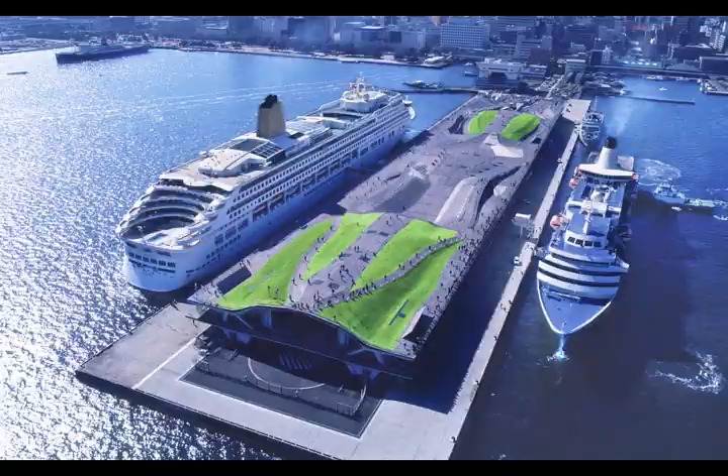The style of the terminal can be considered parametricism, a style recognized as being avant-garde and technologically adapted. The uprising of parametricism occurred during the modernist movement in architecture, and as P. Schumacher says, it succeeds modernism as the next long wave of systematic innovation. The defining concepts of parametricism include shared concepts, computational technologies, formal repertoires, and tectonic logic. Exemplified in the terminal, parametricism is, aesthetically, the elegance of ordered complexity in the sense of seamless fluidity.

While there is truth behind this sentiment of revolutionizing a new way of developing and utilizing architecture, the terminal was also designed with respect and reverence to the customs of the Japanese architectural vernacular, prioritizing congruous and sociable qualities. With an open, multivalent layout that allows for human autonomy while meeting specific functionality contingencies, the terminal fits within the cultural context of having life and openness in architecture, acting equally as a window of the past and as a window to the future. Spatial fluidity is present in the design through its incorporation of vast and seamless spaces, contributing to the establishment of a clear design theme and the congruency of the overall aesthetic.

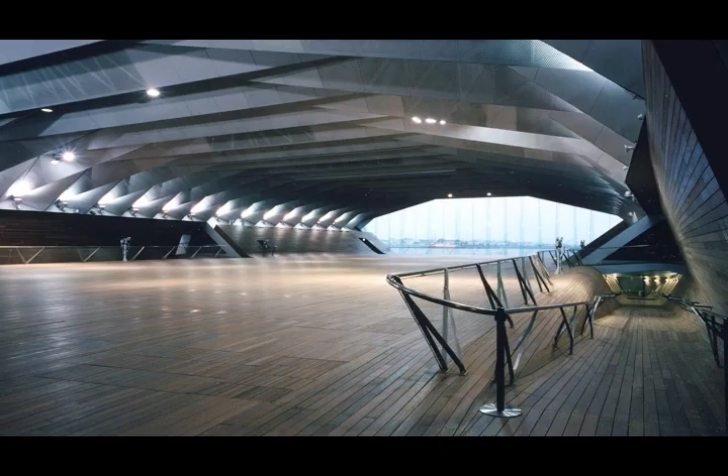This unrestrained and unobstructed design language contributes to the feeling of the static structure having movement and spirit. A specific way that this is done is through the harmonious blend of interior and exterior spaces, contributing to the lack of apparent forced enclosure and the connection of the people to the space.

Along with consideration of the interior and exterior, through the construction of the Yokohama Port Terminal, the environment played a significant role in the design and choices of Foreign Office Architects. Concepts such as the identity of the space as a transportation hub and the blending of the environment with a built structure were all focal points in the development of this project.

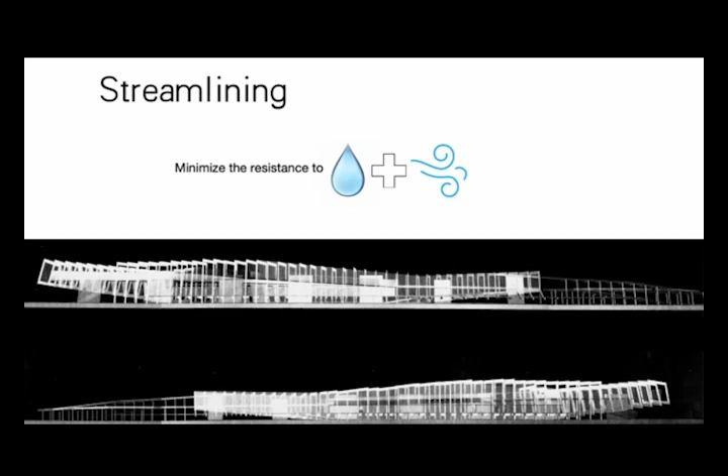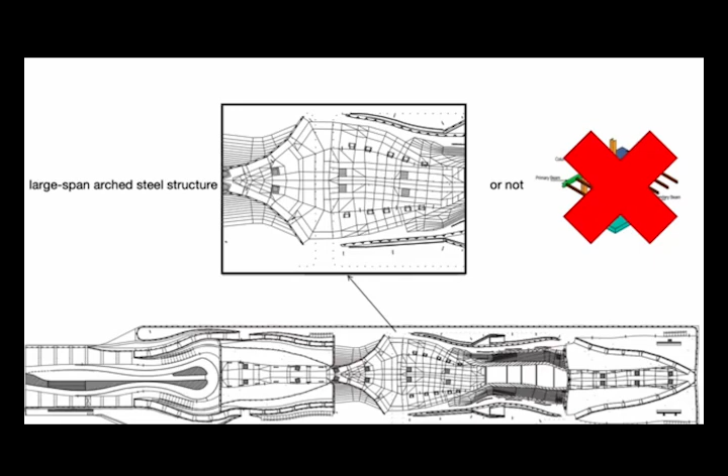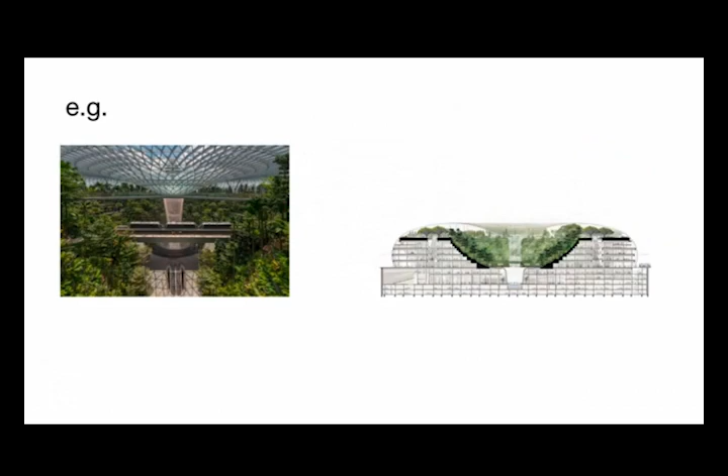Instead of the typical post and beam structure that can be easily replicated, the terminal building is constructed with a large span arch steel structure. This creates a flexible, column-free space with a seamless transition between the interior and exterior. As a result, it can be used both as a covered public space and for a variety of purposes beyond travel.

In this multifunctional space, all mechanicals and baggage handling units are designed to be concealed within the structure and raised timber floor system. The queues function as entry or exit borders and are assembled as mobile units on wheels, reversing the typical rigidity of border control arrangements and allowing the terminal to function beyond its regular function.

Through this combination of structure, flow, mechanical services, and material finishes, the terminal conveys planes, openness, and laxity, and efficiency in the parking areas, curves, fold, diagonals, symmetry, and utility in the terminal floors.

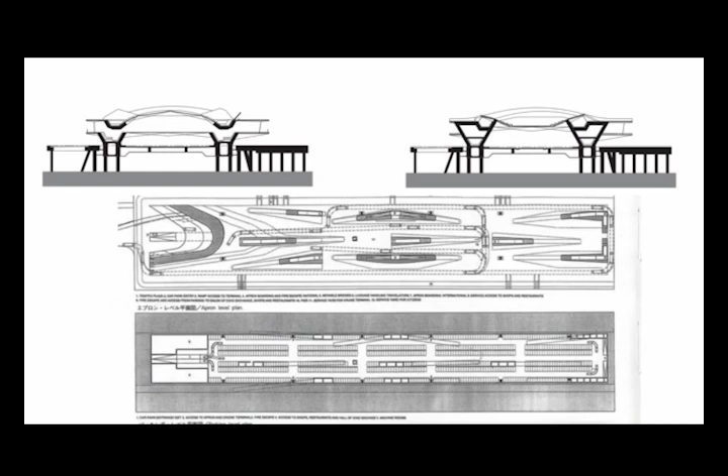This is the profile study model. According to the elevation pictures, we can see there is really good flow throughout the whole horizontal model.

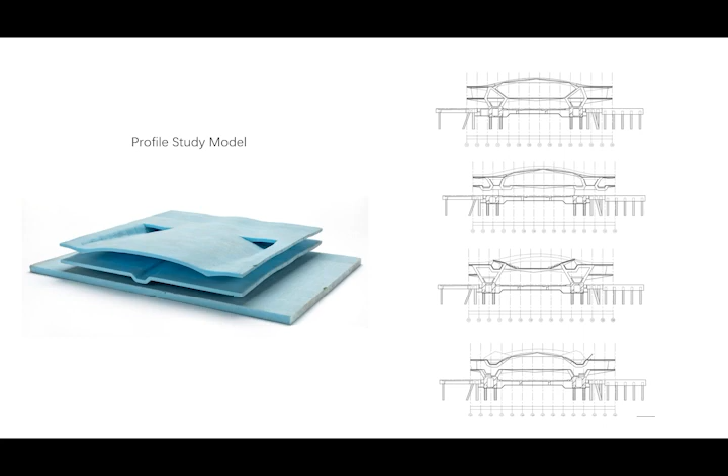Eventually, the whole building was divided into 3 vertical levels. First, the roof, which is just for people relaxing and watching the views. The second floor is more functional, with a restaurant, shops, and some halls, where people can spend their time while traveling. The first floor is just for transportation, like parking, elevators, and things like that.

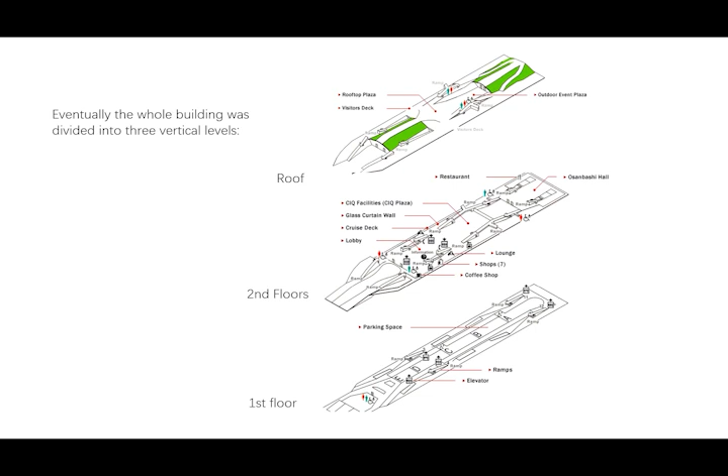When the building is viewed from this perspective, the original complex plan can be understood by everyone. Just like the picture shows, the plan displays the different functions, and it looks like a really symmetrical shape for the whole building.

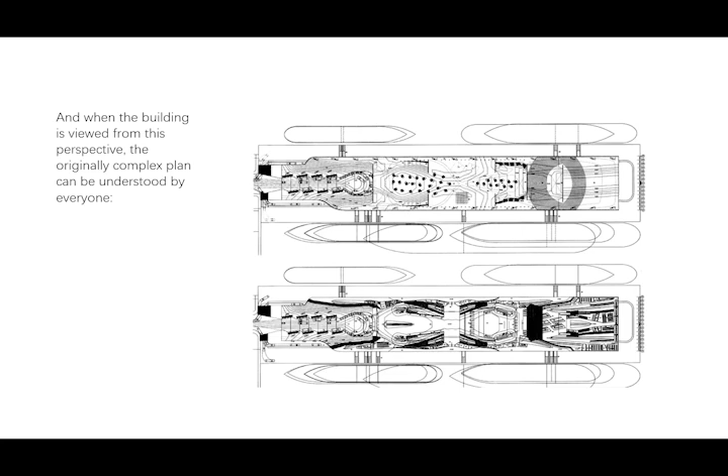Structure and materials: the realization of such a complex form was a severe test for the structure design. Guided by such an extreme concept, the building's space has a great span both vertically and horizontally. If a conventional column network structure was used to realize this, the original simple spatial approach would have been destroyed, which would have been a waste of space.

In collaboration with the structure design team, FOA finally adopted a unique structural system, a box girder made of folded steel plate, as shown in the pictures below, and steel trusses above the water surface of the terminal. This provides the building with lightness and flexibility to withstand earthquakes, and avoids interruption of the flow of space by structure elements such as columns and load bearing walls.

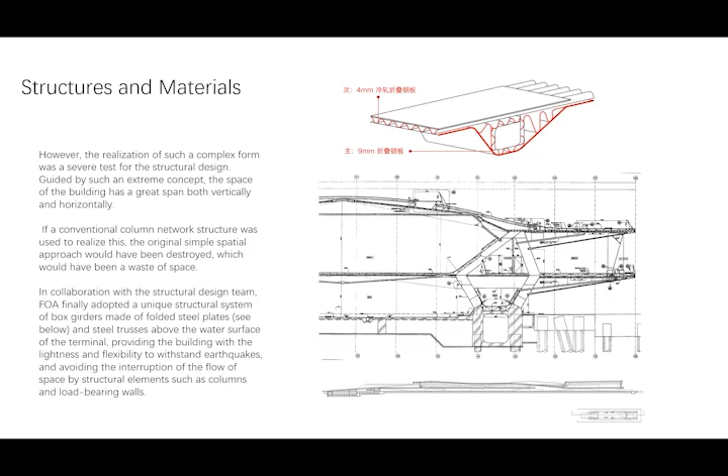The roofs and ramps, which are surfaces for people to walk on and rest, are surfaced with wooden boards, forming a section of undulating, barrier-free public space. This space is also connected to the 2 parks around it on the shore, realizing the continuity of the coast, ensuring an unobstructed view of the sea, and highlighting the natural atmosphere of the outdoors.

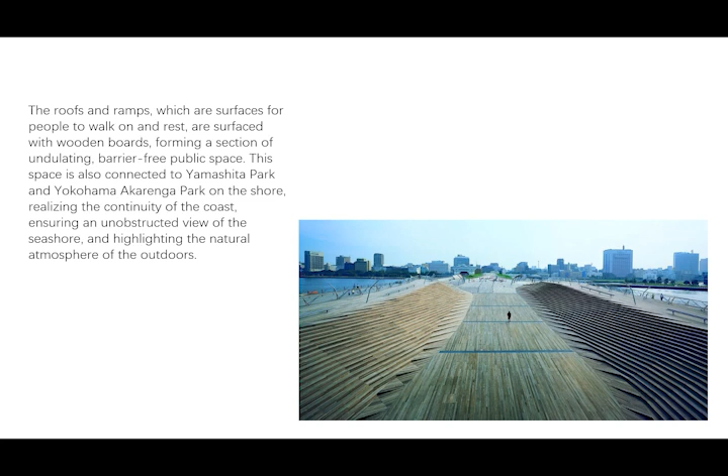The ramp acts as a continuation of the outdoor public space. It holds a core concept of the design.

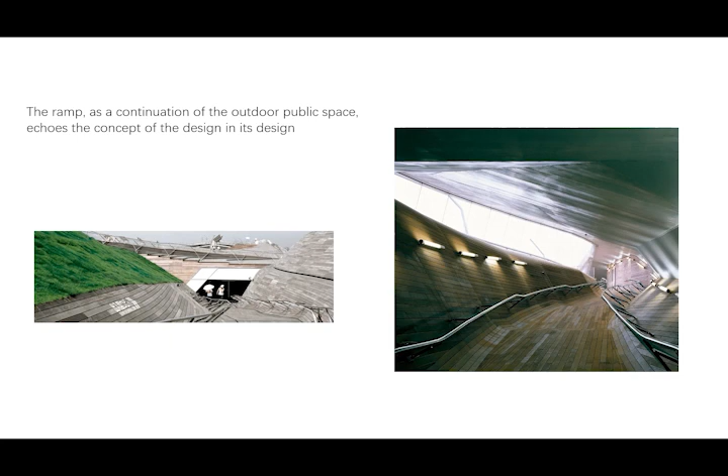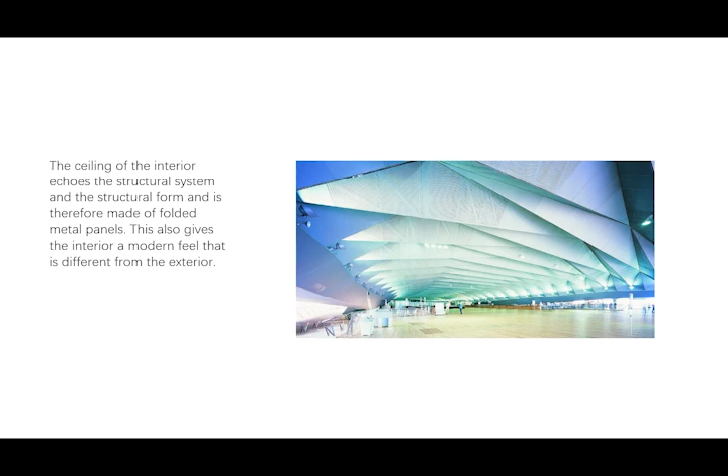The ceiling of the interior, the structure system, and the structural form are made of folded metal panels. This gives the interior a modern feeling that is different from the exterior, compared to the wooden material.

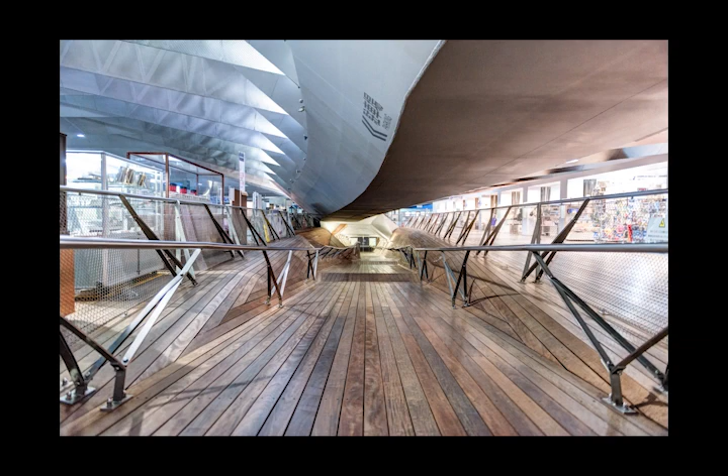One of the last topics we decided to focus on for the Yokohama International Port Terminal was the result of its design and its advantages. The Yokohama Port Terminal was one of the first major projects to fully explore the capabilities of computer design, and it received critiques as the largest marine terminal in Japan.

It is made up of 3 levels: the first floor being the parking garage, the middle floor containing restaurants and shopping centers, and lastly a rooftop level with an observation deck and lots of greenery.

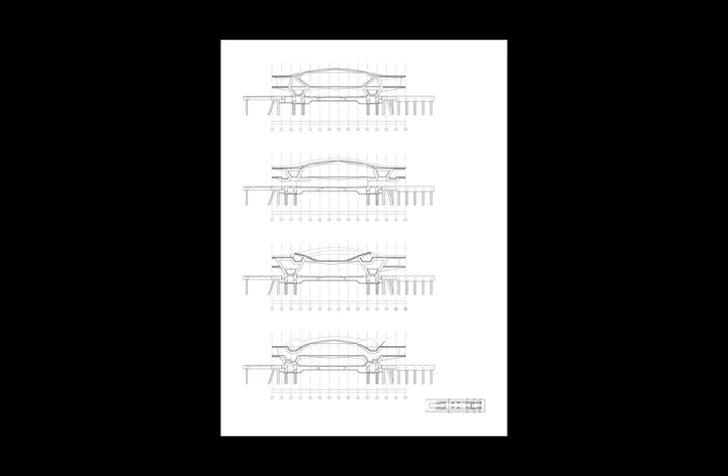Its advantage is that its pattern and intricate designs transfer forces diagonally within the building, which helps withstand earthquakes and seismic activity. Materials used in the Yokohama Port Terminal are timber, steel, and concrete, which display effects of flatness, openness, and undulation.

One of the most intricate details is the folded metal roof found on the parking floor. The folds help distribute the loads on the building. Another intricate detail is the intersection of circulation patterns, which broke up traditional linear port designs at the time.

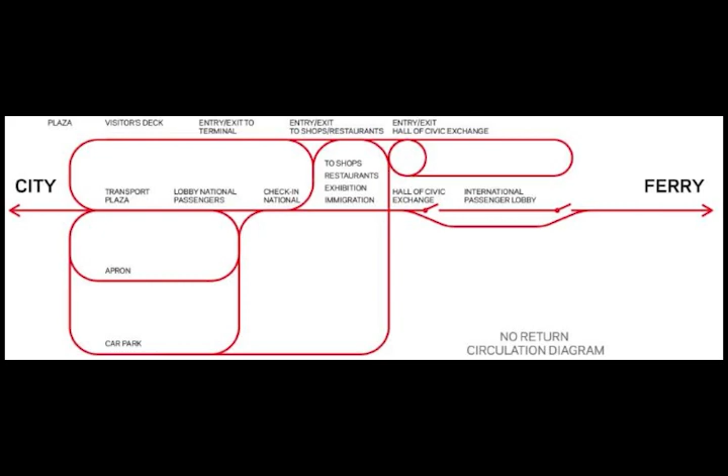The design of the Yokohama Port Terminal allows for ample and usable space for the public, and serves as a model design for the future of architecture, in which Rem Koolhaas describes it as an investigation of fluid structure. The freer language makes people feel excited about the things they are familiar with.

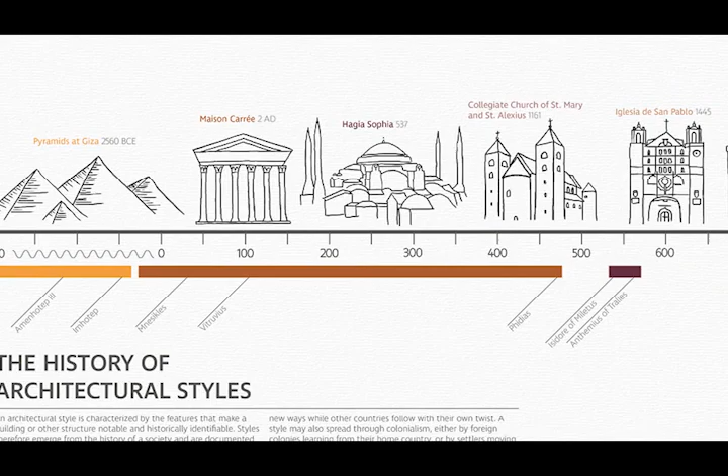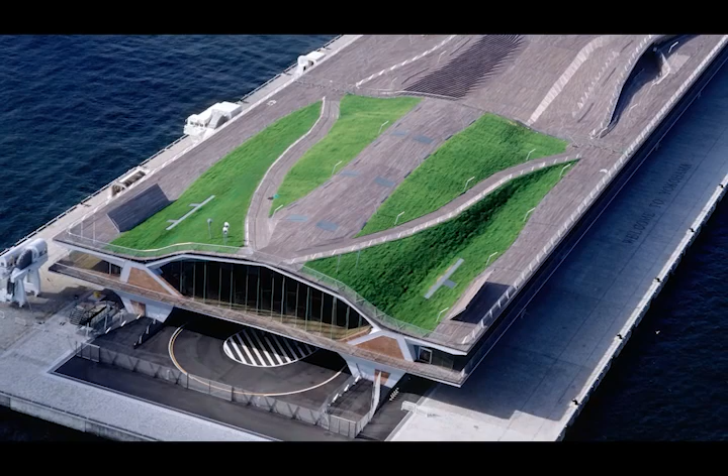In the world of architecture, the Yokohama International Passenger Terminal stands as a striking symbol of progress. This modern marvel exemplifies a profound truth eloquently expressed by Frank Gehry: architecture should speak of its time and place, but yearn for timelessness. This principle comes to life in the Yokohama terminal.

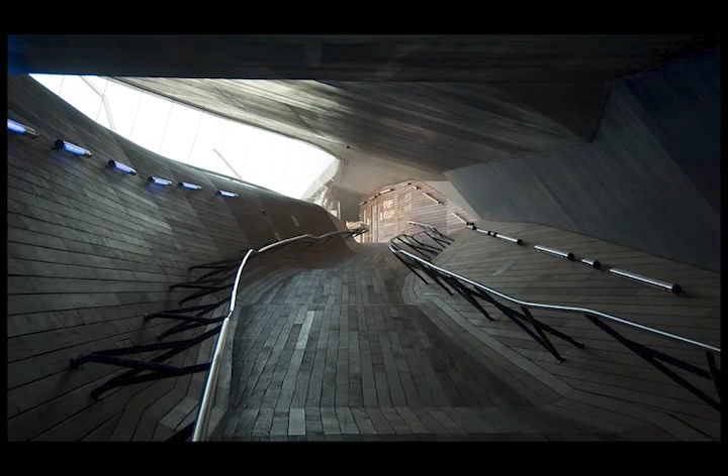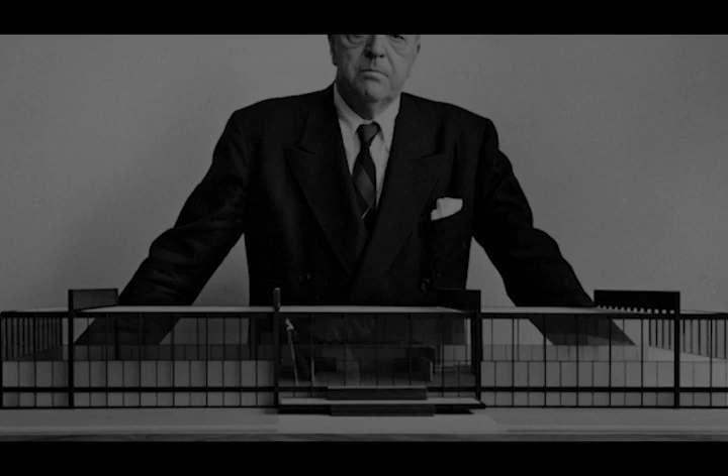Here, parametric architecture, often viewed skeptically by traditionalists as a fabricated threat, asserts its significance. Far from being a passing trend, it breaks through old architectural modes, marrying the spirit of the time with the latest technological advances. The Yokohama terminal does more than redefine architectural norms; it reshapes our collective view of the space we inhabit.

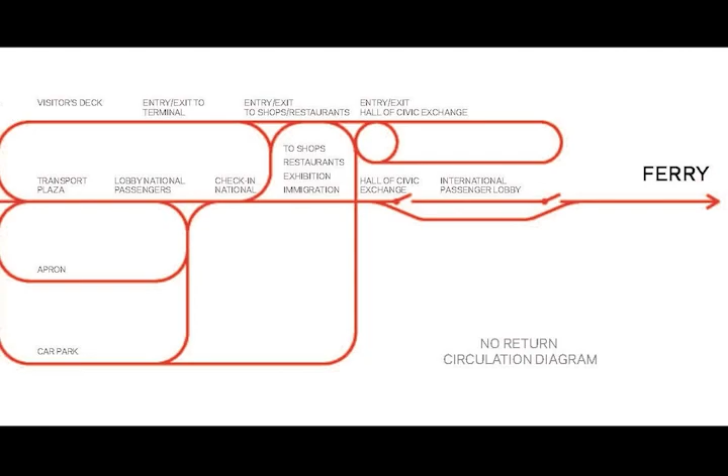It invites us to envision architecture in new, exciting ways. This pursuit of reinvention is at the heart of the terminal's quest for timelessness, setting a new benchmark for architectural design. Today's cities continue to exude the dynamic energy of parametric architecture, embodying both its aesthetics and functionality.